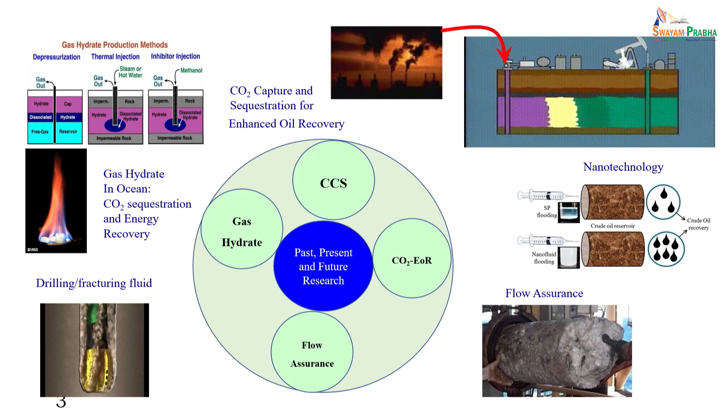So today's talk, I will focus primarily on properties of carbon dioxide, and then mainly on the capture side, CO2 capture and transportation. And of course, as I said, there will be talks given by various other faculties which will cover utilization, catalysis partly, maybe conversion, maybe electrochemistry, etc. So you have to connect the dots, right?

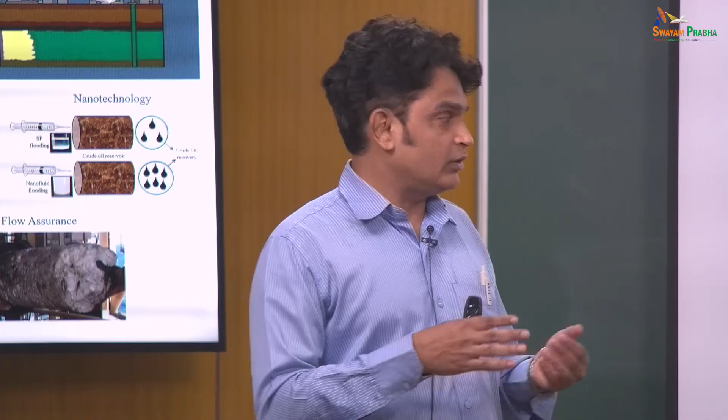So she has already discussed these climate issues and how the temperature is increasing. We are close to around 420 ppm or so, and we have been releasing about 36 gigatons of carbon dioxide into the atmosphere every year, and it is increasing day by day, right? Why is it important? Even if you talk about 420 ppm, the question is whether it is really a matter of worry. It's like out of 1 million balls, we have 420 balls. So do I really worry about it?

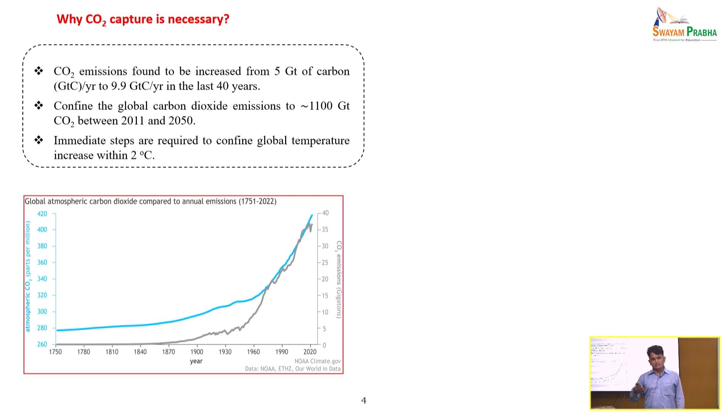It is indeed. There have been certain lab scale experiments where it has been shown that a small amount of CO2 can be responsible to increase the temperature. If you really make sure that all the conditions mimic the atmosphere, then the temperature will rise. For example, I sit in a car, close the door and then come back after a while, you can feel that the car is hot, you cannot really stay inside, right? So this is the greenhouse gas effect, and we have to really worry about it. And if you look at the data for the past several years, there is a rise in temperature. There are various other factors, but one factor is carbon dioxide emission, right?

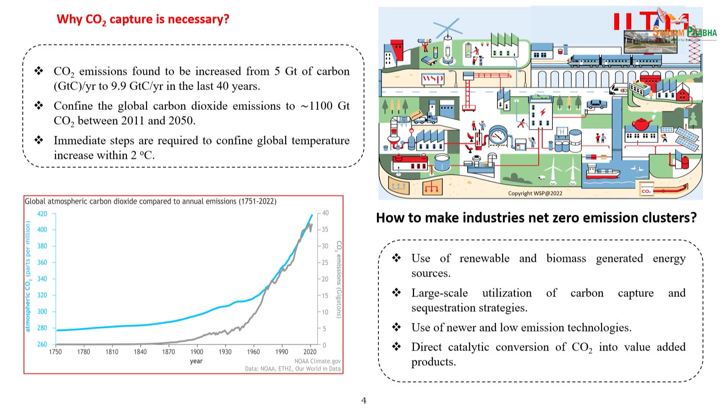Now how can we go for net zero? Of course renewables are something that we have to look at. But can we really go for renewables? That is a question. Can we really take care of all my energy requirement from wind, solar or so? No, it's not possible, because today about 82% of the energy mix is coming from fossil fuels all over the world, right? Growing economies like India and China are primarily dependent upon fossil fuels, including coal, oil, gas. If you go out of the campus, you will find several thousands of cars, automobiles running, including two-wheelers, and all use oil, petrol. If there is a strike by petrol pumps, there will be a mess in the city. All prices will go up, right?

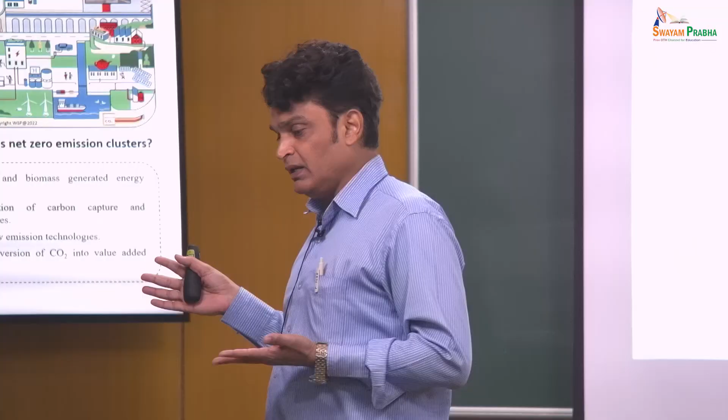So energy is very important for our living. If you do not get oil, there will be an energy crisis. And if there is an energy crisis, then there will be a food crisis. So all this is connected, right? Nowadays, it's not that we get only locally made food. We cannot survive on one thing, right? So energy is very important for our living, and our energy requirement is increasing day by day. I joined IIT Madras campus in 2010, and there were very few cars; even as an assistant professor when I joined, I did not have a car. I got it in 2021 or 22.

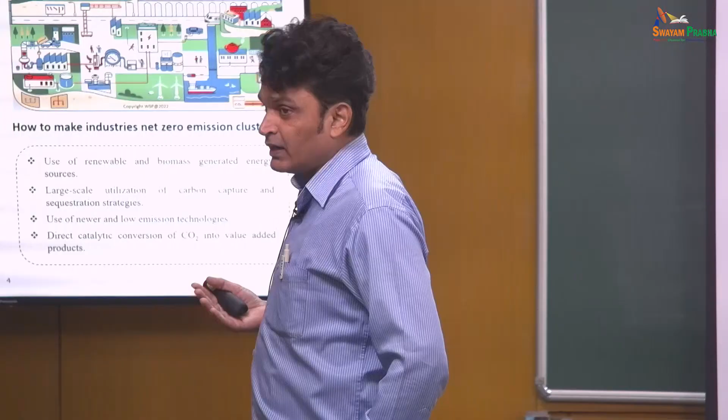I was happy riding my cycle. It's okay, I am living in a campus, why should I need it, right? My children were studying in Kendriya Vidyalaya, so they were going in two-wheelers, so I did not have a car, to be honest. It is not that I was not able to buy it. But today, any assistant professor who joins the campus comes with not only one car but two cars. Because his wife is also working, he is also working, so both of them have a car. So you can see the difference, right?

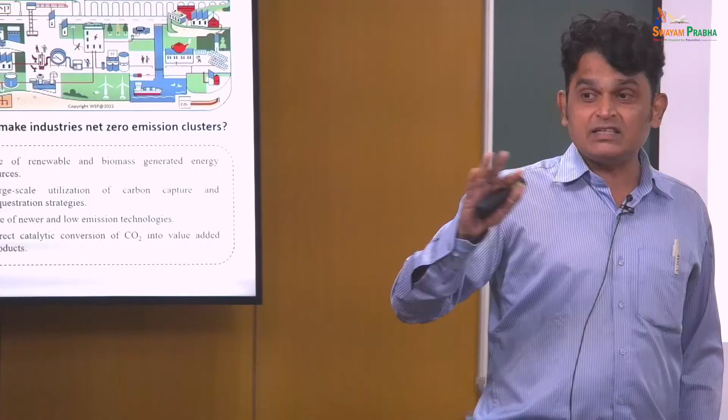All the classrooms are becoming air conditioned, right? Now that energy is not coming from nowhere, it's coming from electricity, and electricity is ultimately coming from fossil fuel, right? So we have to understand that our energy requirement is increasing. Just looking at everything, I have a dishwasher, I have all kinds of electric equipment, and that requires energy. So energy is very important, right?

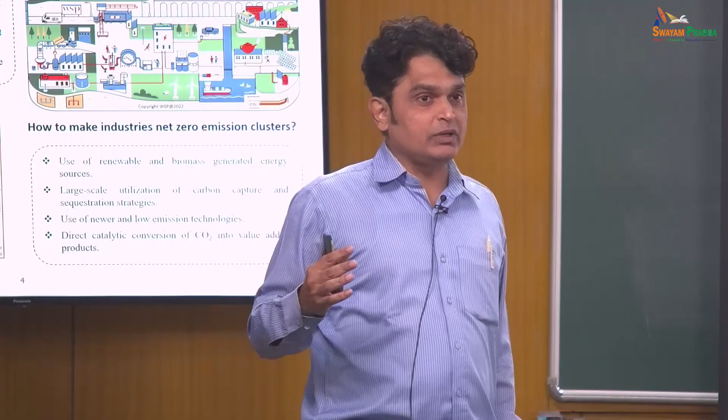So in a short time, or at least 3 to 4 decades, I do not see that we are going away from fossil fuels, right? There is not going to be a magic that suddenly after 2 years we will have something completely coming from renewable energies, right? And there have been certain studies which show that even for 50 to 60 years, fossil fuel will dominate the energy basket. The International Energy Agency says that. Anyway, I am not really going into detail about that.

So what is pollution? We talk about man-made pollution. We have solid land pollution. Everybody is aware of this, right? We have liquid water pollution that pollutes our rivers and everything, and you have air pollution. 3 major forms of pollution. Now what is the difference between them? If I go back and see, I can easily segregate this solid material from the land. I have plastics, I can segregate that easily, I can even hand pick that. It's easy for me to separate it out from the land, right?

Go with water, the liquid phase, molecules are different. It's slightly challenging for me to separate dyes from the water. So I need a membrane, RO, reverse osmosis, and all kinds of chemical processes that require additional energy, right? Go for air pollution, very difficult. Once it is in air, I cannot say that you see the CO2 molecule going from your nose, you capture that and put it in the dustbin. I cannot say that, right? So a molecule that goes into the air is difficult to capture, right?

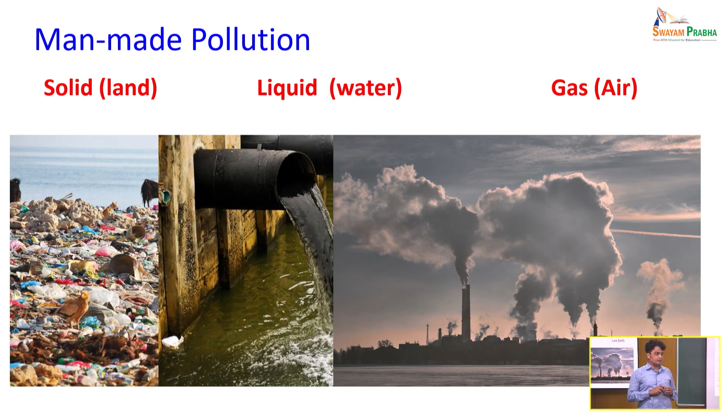So either you have to segregate before you make the pollution, or you segregate after you make the pollution. Which is easy for air? Before, right? So you segregate it before you release it into the atmosphere. That is the more challenging aspect of air pollution that we talk about. Of course, air pollution involves particulate matter and many other things that I am not going into in detail. But as far as CO2 is concerned, we have to ensure that technologies are developed so that before it goes into the atmosphere, we capture it and dump it somewhere.

All right. Now, of course, this CO2 emission is increasing, and as I said, the majority of it is from energy consumption, like transportation, energy used in buildings, other industries, etc. And of course, there are agriculture, forestry, and land use. So energy is a major sector that results in CO2, carbon dioxide, pollution.

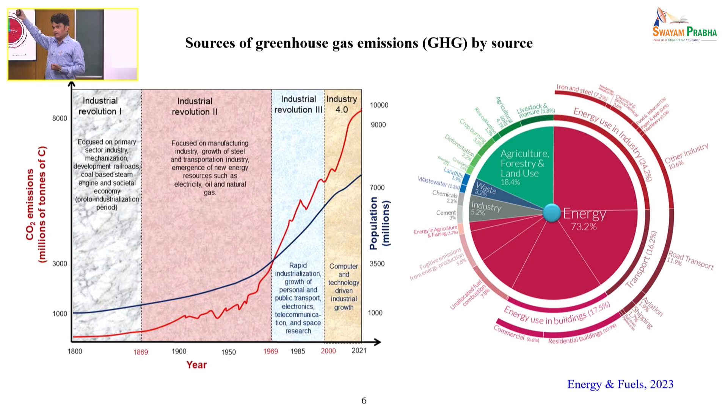Anything, you have a flyover that you can see in Adyar, right? They are building flyovers everywhere. Ultimately, that results in pollution, because you have to generate cement, steel, and everything. You have cranes running there, right? To generate cement, you require a lot of energy. You release CO2. Even to generate the steel required there. So every man-made activity ultimately has a CO2 footprint. Even the chair that you are sitting in is not CO2 free, right? It has generated a certain amount of CO2 into the atmosphere.

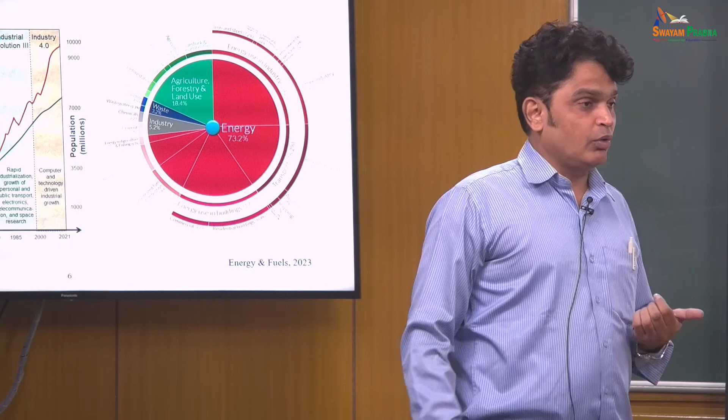So why I am telling you this is that today we are talking about a $3 trillion economy. The Prime Minister says that we have to go to $5 trillion, $10 trillion, and so on. Every country wants that, right? Can that come saying that I am not going to emit CO2 and still I have a $10 trillion economy? It's not possible. There has been a correlation of CO2 emission with economics rather than really population. The higher you want your economy to be, the more you become a consumer. You consume and throw, right? So sustainability is an important aspect of this whole game. Anyway, going forward, now the global temperature is rising.

I think Madam had already covered that, the global land to ocean temperature anomaly, and somewhere around the 1970s, 80s and beyond, it is increasing. Now there are various scenarios that show, if you capture carbon dioxide or if you do not capture carbon dioxide, how the annual mean global temperature will rise in the next few years, right?

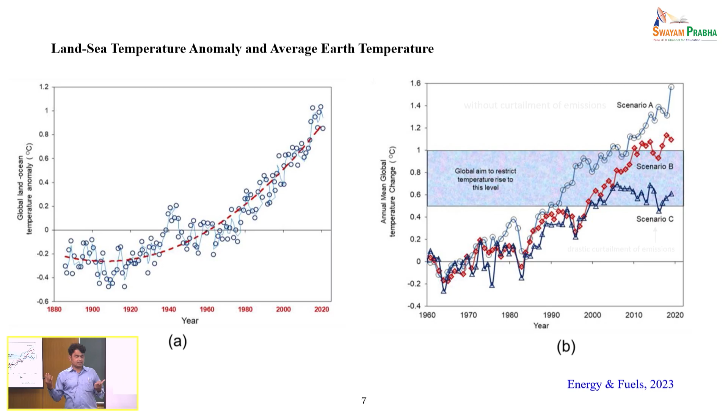And there are certain models. I think Madam will cover that in detail, so I am not really going to spend more time on that. But you have to understand that we have to predict the future 20, 30, 40 years down the line in energy, environment and earth. So if you look at the name of my lab at IIT Madras, I have written 3E lab. It talks about earth, energy and environment.

It is a nexus. I cannot say that I do not want energy, but I want less CO2. The more energy you want, the more CO2 you are going to release into the atmosphere. So you have to dump that into the earth, or you have to take care of your environment, right? So all these 3 E's are important when you look at overall climate change, and this nexus has to be understood.

Anyway, so this is an example of coal, right? In the 1970s, 50s, 40s, you might have seen steam-based transportation through trains, etc. The British used to have trains, right? And then because of pollution, they stopped that. I am not going to run the train on coal because it generates a lot of pollution; I should run it on electricity. Now, most of the trains are actually running on electricity.

And this is the data that shows that from somewhere around 1950 onwards, the use of coal in transportation has decreased. It's almost negligible from the 1960s onwards, right? I do not see coal. Earlier, when I was a child, I could go into the market and buy coal, right? Coal was even used in households for cooking. Kerosene was used in households, right?

But today if I go into the market, I will not get coal easily. I have to find out; somebody will say go here and there, right? Getting coal is not easy right now in the general market. But look at coal use in electricity generation. It has increased. So when we cannot see something, does it mean that we are going away from coal?

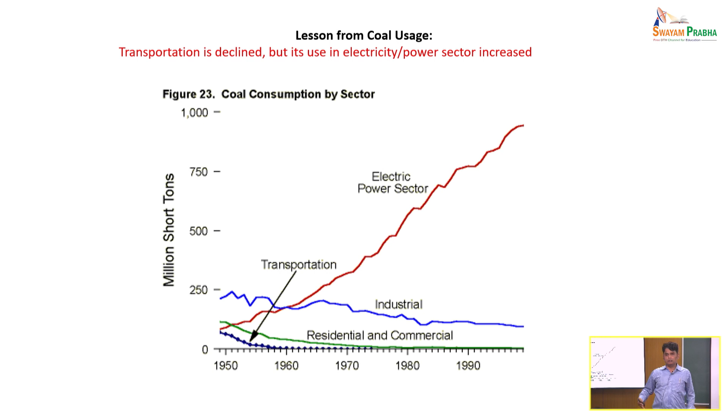No. Even today, as Madam said, Germany wants to restart their coal-fired power plants. I was reading a couple of weeks back that New Zealand also wants to import fossil fuels, right? So they have realized that it's not a quick decision to say that I am not going to use fossil fuels, right?

So take electric vehicles, for example. I am a little critical about electric vehicles. Of course they look very clean, but if you go back and look at the calculations, you will find that they are more difficult for the environment, because they do not reduce the electricity requirement. Where will the electricity come from? If we really generate all electricity from solar energy, then that's fine, right? But I am not seeing that happen anytime soon.

Even to make silicon solar cells, there are calculations in the literature which show that they also generate CO2. So nothing is CO2 free or net neutral. Less than 1% of vehicles on the road are electric vehicles. There are about 15 million or so electric vehicles. But given that I am happy with electric vehicles, does it mean that I am going to go away from fossil fuels? I require more energy.

Anyway, going forward, CO2 in the atmosphere. Nature has its own way to address the CO2 concern. It has said, okay, whatever CO2 is being emitted, I will capture that. Almost 50% of CO2, it has been said, nature takes care of on its own; it absorbs it. But because we are growing our economy and burning more fossil fuels, the net CO2 going into the atmosphere is increasing gradually every year, and it is getting accumulated.

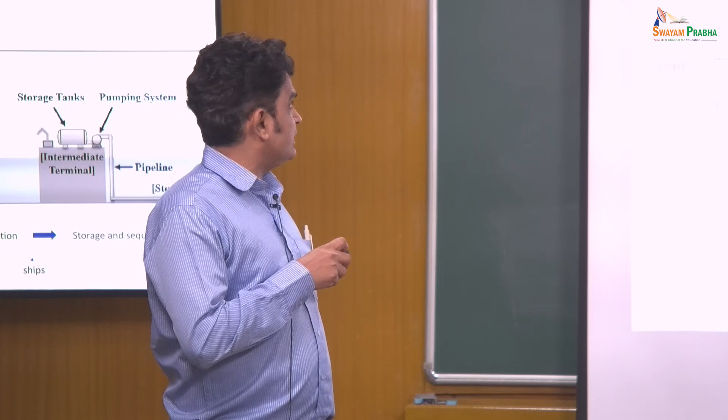Now in one of my talks next week, I will discuss how oceans are a very ideal candidate to sequester carbon dioxide. Scientifically, it is very attractive. Anyway, when you talk about onshore or offshore, you require all these facilities: processing, liquefaction, pipeline, and then ships, and then you have to sequester below the ground, onshore or offshore in the ocean. Now this is a CCS supply chain: carbon dioxide capture, transportation and sequestration, and utilization, where you have to convert that into value added products like methanol, ethanol, dimethyl ether or something like that.

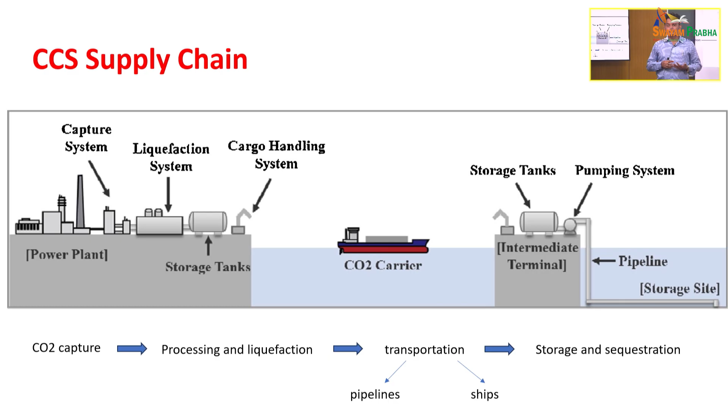What kind of product can you convert CO2 into? Anybody else? Urea. What else? Carbonates, methanol, right? Most of these conversion processes still require energy, right? The raw material that you require, for example for methanol, requires some kind of hydrogen molecule. Where will the hydrogen come from? Today 99% of our hydrogen comes from fossil fuel, right? Less than 1% comes the so-called green way. This is what the International Energy Agency report says for 2021, right? So conversion is still a long way to go.

Utilization, unless I could get hydrogen from biomass or from water by splitting water through solar energy, which is again very tricky. Of course there are technologies available, but these are not something that can be looked at on a large scale. I cannot say that I have all hydrogen coming from solar power plants by splitting water. I can do those experiments in the lab, but it's still a long way to go. So what is a quick way to act? I am not criticizing any technology here. I am saying that I do not have time, I want a certain quick decision. So the quick decision is that I have to dump it somewhere.

Huh? Dump it in sea or onshore? No, I will tell you that it's not that. It's at least more favorable in ocean or onshore. Scientifically, that is proven, right? So anyway, we will discuss that.

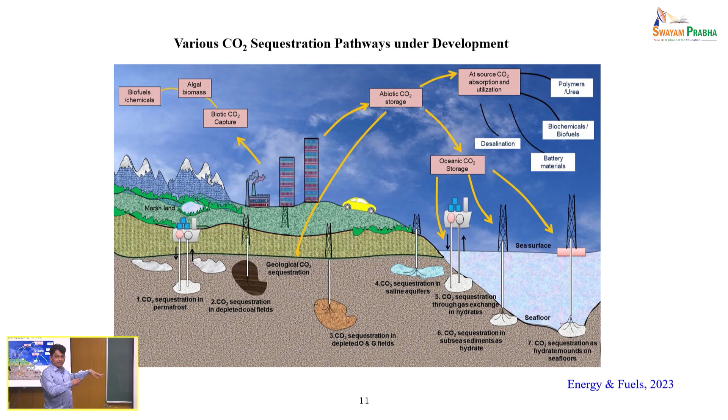The other potential region is the sea floor, where you can sequester it in the form of solid hydrates or below the seabed, and that I will discuss in one of the next classes; it is not the focus of today's discussion. Madam will partly cover aquifers and EOR, etc. Though we have worked on that, I think Madam will be best to discuss all these details. Anyway, so this is the ocean storage.

So in the ocean you can sequester in different aspects. You can do CO2 plume sinking. You can have disposal of CO2 in the form of carbonates, because CO2 can convert into carbonates. You can actually have CO2 liquid pools in offshore conditions; CO2 will form a liquid in those conditions. I will discuss that in detail in the next class, how CO2 can form a liquid in the ocean and why it is safe.

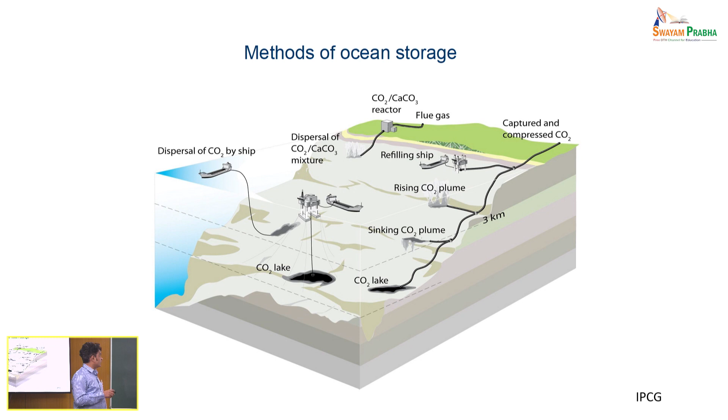And anyway, this is generally the CO2 storage mechanism. You have flue gas, a CO2 separation reactor, captured carbon dioxide is compressed, and then you can transport it through pipelines, ships, risers, etc. Now there are various technologies available right now, from CO2 capture to sequestration. And this is TRL, technology readiness level, which goes from concept to commercialization.

Most of the technologies, you can see, are at TRL 9: post-combustion capture of CO2 from power plants, pre-combustion capture of carbon dioxide specifically from natural gas processing, transportation in onshore and offshore pipelines. CO2 is being transported; even though in India we are not doing it, in countries like Norway and the US there are onshore and offshore pipelines transporting carbon dioxide. Then transportation by ships, CO2 sequestration in saline formations, and CO2 injection in depleted oil and gas fields or for enhanced oil recovery. These are all at TRL 9.

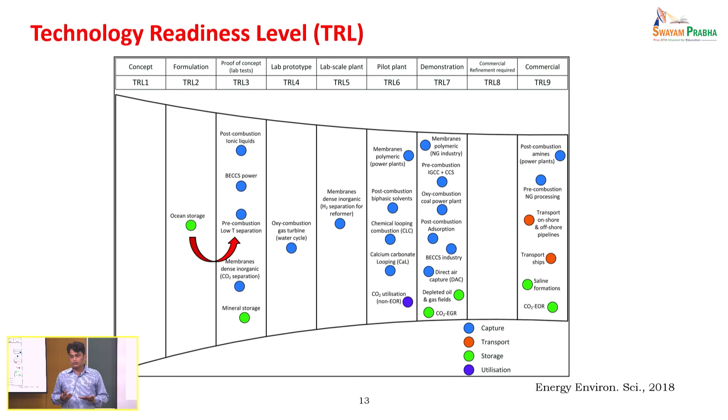Anyway, why this major focus on CO2 capture? Because to segregate it from air or flue gas, you have to capture carbon dioxide first. One way is to capture CO2 from flue gas; another way is to capture CO2 from air. As I said, at 420 ppm it is a very small amount, very difficult. I do not know where the CO2 is lying here in the room. Challenging task. That is called direct air capture, DAC.

People are also looking at direct air capture technologies. There are plants available commercially, but they are still not seeing major expansion. But slowly it is expanding because the government has to do that.

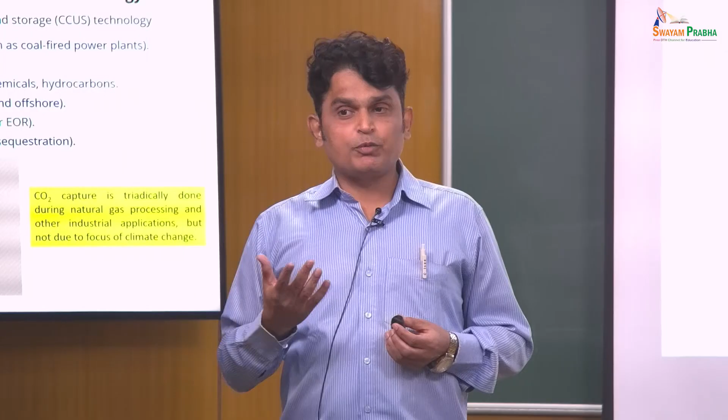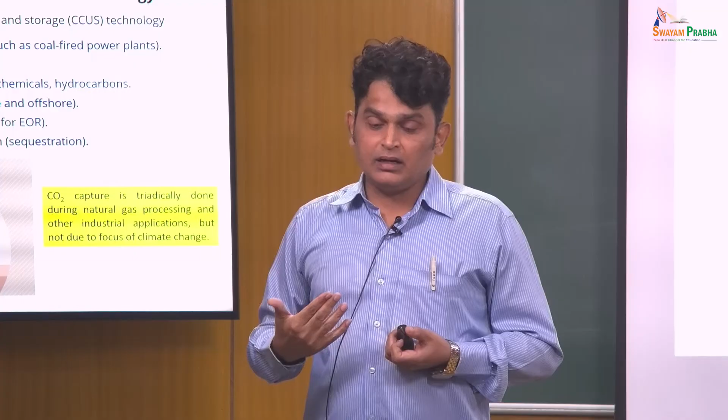Now this is junk that we produce. When I segregate my waste, I am not generating anything out of it, right? I still have to pay the corporation; they charge me a tax or something like that. So we pay for segregation. Similarly, as human beings, to ensure we are in a safe environment, we have to pay for that, so there will be a penalty in terms of money. Technologies are looking at how to reduce the cost of capture, transportation and sequestration, and in the last few years that cost has come down slightly with developments in technology.

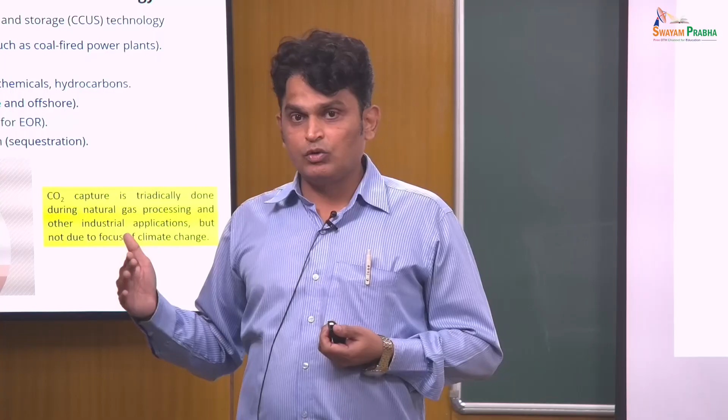So we'll discuss a little bit of the cost aspects, right? Now the CO2 capture: either looking at a stationary plant or point source like a coal-fired power plant, or you can do that from direct air capture. You can convert that CO2 as a feedstock for petrochemicals and hydrocarbons. Again, challenging, as I said, it takes time.

You have to transport that from the point source to the storage sites, either onshore or offshore, by pipelines, and you have to inject that into the underground for enhanced oil recovery or depleted oil and gas fields, etc., or you can do that in the ocean, right?

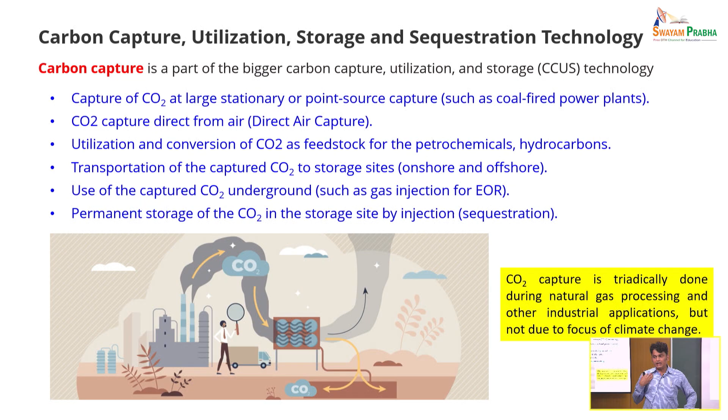CO2 capture is traditionally done in natural gas processing and other industrial applications. It's been there earlier; it's not something that started recently. The natural gas industry has been doing it for a long time, right? But they were not focused on climate issues. So the technologies were available for specific applications.

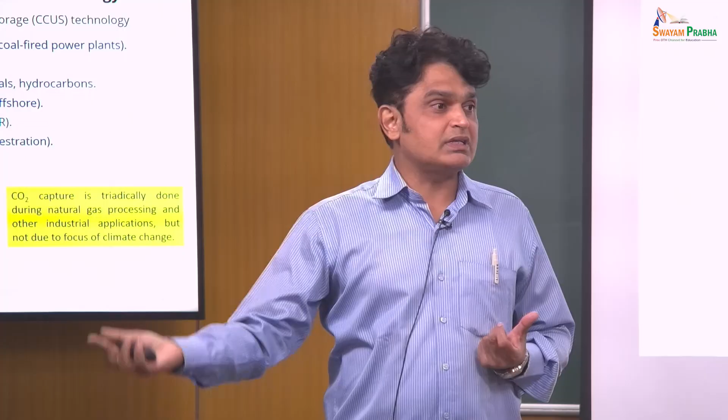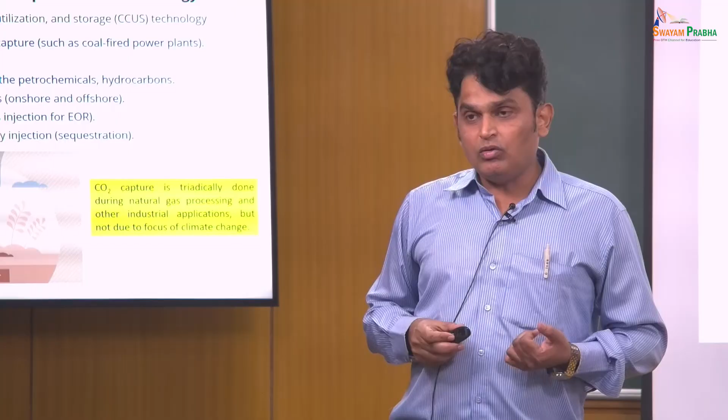Now similar technologies are being expanded, and of course new technologies are also coming up to take care of the CO2 from flue gases, power plants and other industrial activities where CO2 can be captured and stored. Now this requires significant strategic decisions.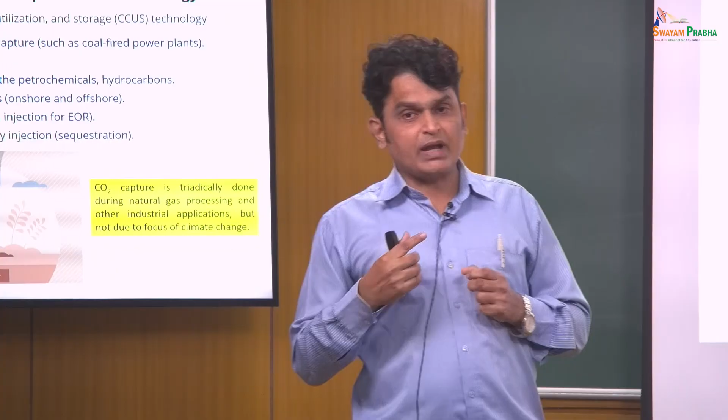Why? Because one has to understand that you need to develop CCS corridors where I can capture CO2, transfer that to the pipeline, sequester it into the formations, or use it in industrial applications. So CCS corridors have to be developed by different countries so that this overall process can be made very efficient, right? So anyway, what is important about carbon dioxide?

Now if you look at this carbon dioxide phase diagram, everybody understands the phase diagram, right? Simple stuff. Carbon dioxide remains gas in this zone, this is liquid and this is supercritical fluid. The temperature is about 300 Kelvin, which is the critical temperature, and about 100 bar, which is about 1500 psi or 100 atmospheres, or 10 megapascal, is the critical pressure for carbon dioxide. Any pressure and temperature above that, it becomes supercritical.

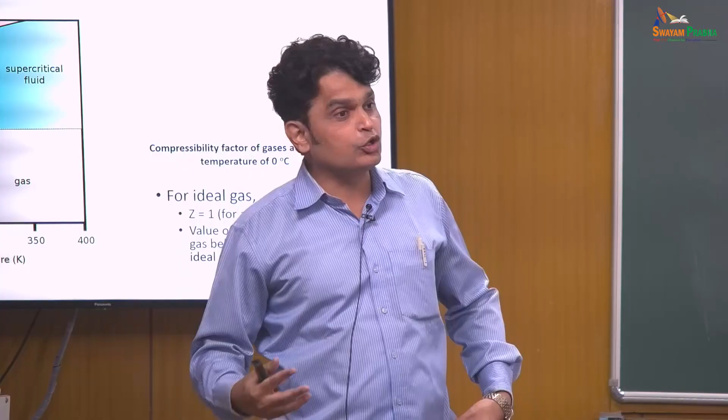Why is it important? Because we should talk about onshore underground storage. Most of the temperatures in the reservoir fall in this zone. So CO2, once it goes into the reservoir underground onshore, becomes supercritical. Supercritical CO2 has different properties, not the same properties as a gas. So you have to understand how supercritical CO2 will interact with different reservoirs like sandstone, shale, or basalt formations.

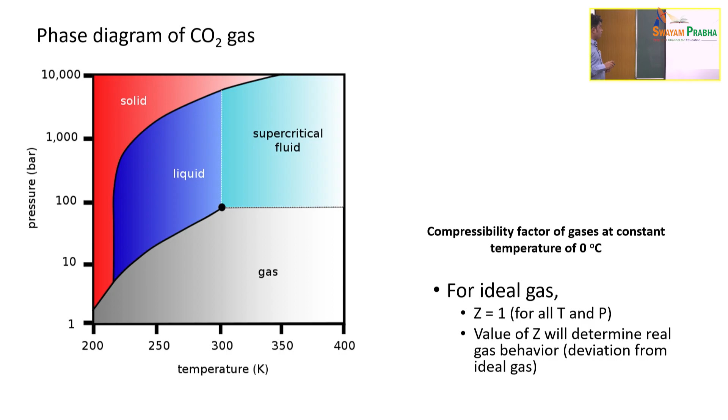If I want to inject CO2 into the ocean, the CO2 at a certain depth will become a liquid. Ocean temperature is close to 4 degrees centigrade, about 270 to 280 Kelvin, and at pressure beyond 5 megapascal it becomes a liquid, right? So if I want to dump CO2 into the ocean, it becomes liquid at those conditions. We will discuss that in detail later on. But this is a very important figure which tells you the different phases, gas, liquid and supercritical fluid, as far as CO2 is concerned.

Now everybody knows that any gas is ideal at normal temperature and pressure, Z equals 1, right? As far as CO2 in the atmosphere is concerned, I do not have to worry about it. But when I transfer it through a pipeline, onshore or offshore, the pressure and temperature will not be atmospheric, and therefore CO2 will not be an ideal gas; it will become a real gas. This simple schematic shows Z versus pressure in atmospheres, from 0 to 1000.

You can see nitrogen, this is for hydrogen, and the extreme lower line is for CO2 and the second one is for methane. You can look at Z for these 4 gases; they vary differently. All have a Z of 1 at normal pressure and temperature, but as pressure increases, the value of Z differs for individual gases.

For hydrogen, Z always becomes more than 1 as pressure increases beyond atmospheric conditions, and therefore hydrogen storage is still a challenging task because of this property. So the volume required to store hydrogen increases as you increase the pressure, and it has not become economical as far as hydrogen storage is concerned. Hydrogen has a molecular weight of 2, a very small molecule.

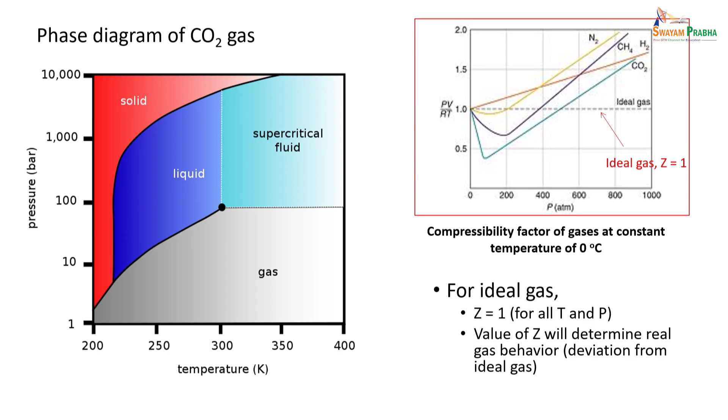For example, I will tell in one of the slides that CO2 is transported at about minus 30 degrees centigrade in liquid form. So what is the pressure required in that condition? It can be low pressure, so I can have a container. LNG, liquefied natural gas, they transport at about minus 170 degrees centigrade at atmospheric condition, because methane becomes liquid at that condition. Similarly, CO2 becomes liquid at minus 30 degrees centigrade, so they transport that. CO2 transportation by ships is more reasonable at those conditions. So some of these properties of CO2 are very vital to understand.

Now one chimney per hour emits how much? This is actual data from one power plant. Can you tell me how much ton is that? Close to 3000 ton per hour, right? Everybody is with me? Assuming this is about 20% carbon dioxide, easy for calculation, how much is that? 600 ton per hour multiplied by 24.

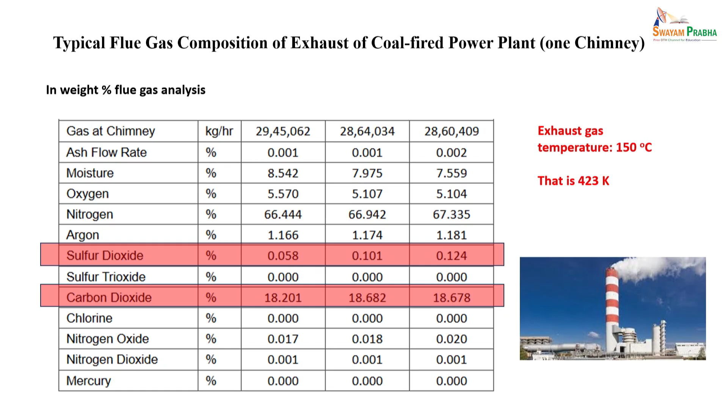I asked them, why don't you cool it down? They said, if I cool it down, the sulfur dioxide will deposit in my chimney and it will corrode. So they do not want to do that. So they are releasing the heat into the atmosphere at the cost of avoiding sulfur accumulating in their chimneys. Of course, CO2 is going out there. Alright. So this is the situation.

Now, the carbon dioxide property that I have discussed: carbon dioxide is not available as a single molecule in the atmosphere or even in the flue gas. It is available along with different other gaseous components. Therefore the properties will change, properties like density, viscosity and so on. So you require equation of state models. You must have studied equation of state models like Peng-Robinson, SRK, Soave-Redlich-Kwong and so on. You use those equation of state models to understand the properties of flue gas and design your operations to separate carbon dioxide from the flue gas. Everybody is with me, right?

Now, what are the important aspects of flue gas generation in the power plant? As I said, energy is important, so we cannot move away right now from the coal-fired power plant. So typically we have a power plant that has to be connected with CO2 capture systems, as shown here schematically. You can have a CO2 scrubber and an SO2 scrubber, as I said, that you have to separate out. You require different types of material because it is not easy to handle SO2, sulfur dioxide.

You have a flue gas that goes into the absorber where you can have different systems like amine systems. You can separate CO2 and capture that. You can have a stripper unit, separate the pure CO2, and then the CO2 can go into sequestration or transportation. You are getting my point? So this is a typical schematic of how the combustion and associated CO2 capture process looks. Let me come, right?

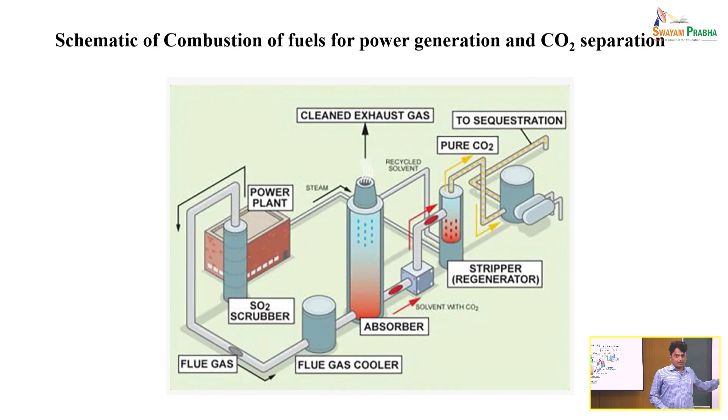Now there are 3 major types of combustion capture. You can do a pre-combustion capture of CO2 or a post-combustion capture of CO2. You can capture carbon dioxide before you release it into the atmosphere. In a pre-combustion process, a fuel is converted into a gaseous mixture of hydrogen and carbon dioxide. You partially oxidize coal in oxygen and air and generate a synthetic gas, syngas. The syngas can further be converted into a mixture rich in hydrogen and carbon dioxide.

The advantage is that you are capturing carbon dioxide at a reasonably higher concentration, so it becomes easier to capture. As I said, when you have less CO2, it becomes very challenging to capture. When you have more CO2, you have a better chance of capturing it. The hydrogen can go into electricity generation, and you can capture that CO2 and store it. Here the CO2 in the mixture can range from 15 to 50%. This requires an integrated gasification combined cycle power plant.

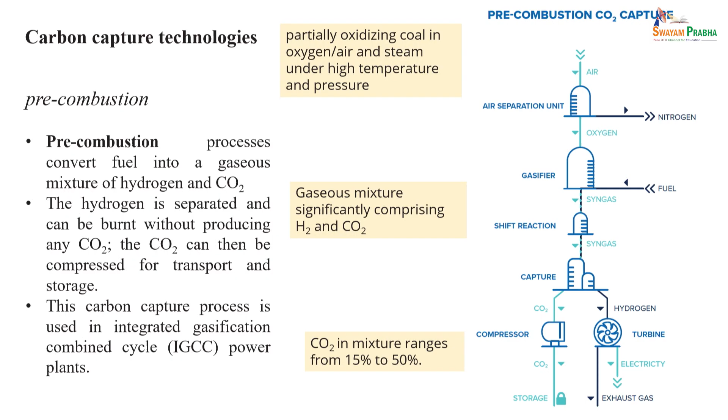These are less available. People are reluctant to do that because it doesn't really add any value to them technically or economically. So unless they get some money, they don't do that. So this is primarily a money game: what really makes it economical, that's the question. Now the other method is post-combustion capture. These are the limitations. Pre-combustion has high efficiency and relatively easier carbon removal from fossil fuel. The advantage is that the hydrogen-rich stream can be converted into electricity efficiently.

However, the overall capital cost of the gasification-based process exceeds that of the conventional pulverized coal-fired power plant, and that's discouraging wider adoption. The cost of the absorption process required to capture CO2 generated by an IGCC power plant can range up to $60 per ton, which is still not very attractive to the companies.

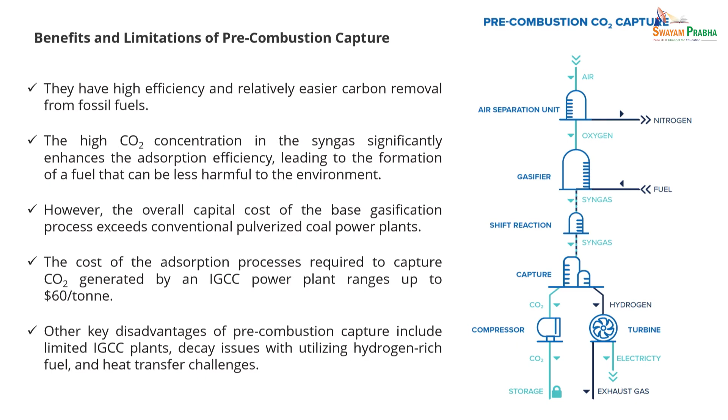Other disadvantages of pre-combustion capture include limited IGCC plants, issues with utilizing hydrogen-rich fuel, and heat transfer challenges. Again, as I said, hydrogen handling is a very challenging task, with safety issues and so on. So this is still at a stage where more research has to be done.

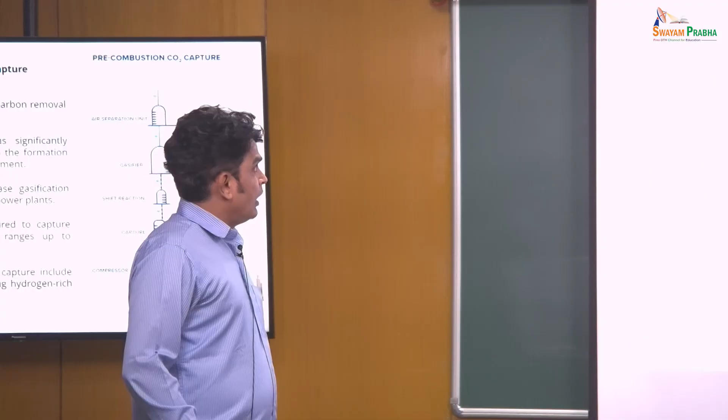Then we have post-combustion capture, which right now is something that people are looking at attractively, because you combust it and then capture CO2, and technologies are available ready made, because you can use conventional technologies to capture carbon dioxide. The challenge is that here the CO2 is very low in the stream. It can be less than 20%, 7 to 14% sometimes, and 4% in a gas power plant. So this is very challenging to compress, but it is reasonably easy as compared to pre-combustion capture.

So this is what a post-combustion capture schematic looks like. You burn fuel, you have exhaust gas that goes into it, you have electricity, and then you capture carbon dioxide and store it or transport it for subsequent processing.

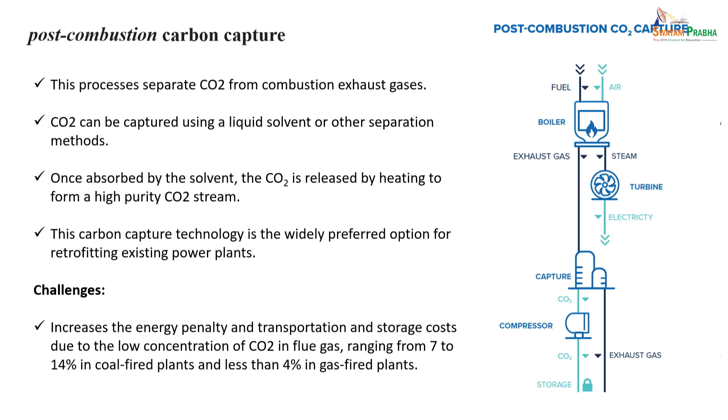Something that is very attractive is oxy-fuel combustion capture. Oxy-fuel combustion capture is a more promising technology that people are looking at. Oxy-fuel combustion uses a pure oxygen stream. So I am not really going to use air as a source to burn a fuel. I will use a reasonably pure oxygen stream to burn the fuel, so that I generate more CO2 which is rich in concentration.

It becomes easy for me to separate or capture that CO2, or I may not necessarily need to capture that CO2, because even if I have 50% or more CO2, I can send that directly into underground storage. I can transfer that directly to the storage. So I can partly address the cost of the capture part, by using a pure oxygen stream to burn the fuel.

So this is a schematic that shows you have an air separation unit where you generate oxygen. During COVID time, oxygenators were used, right? You know that. You get oxygen from air by separating it in a small unit. So a similar kind of thing here.

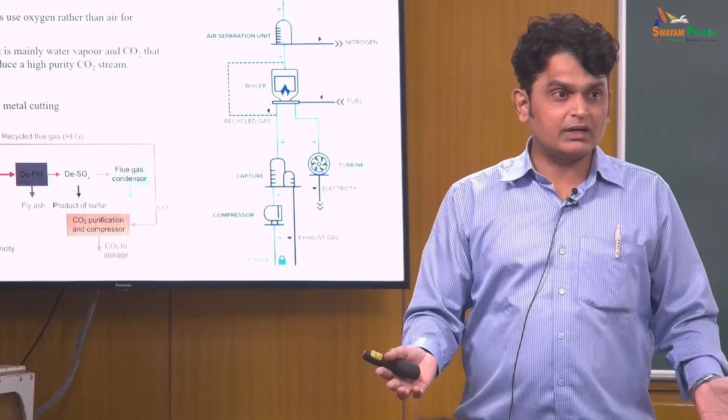You can separate oxygen from the air and use the purer oxygen in the boiler, and because you have oxygen, mainly complete combustion is expected, so you have more CO2 going into the exhaust gas, which becomes easy to capture, and then you transport it to the storage site, and of course you get electricity out of it. So this is a schematic of what I have talked about. You can also have sulfur that may come out, so you can capture the sulfur. So reasonably it is easy to capture CO2 from this stream.

This has been used primarily in steel making and the metal cutting industry, but it also has an advantage that it has a high flame temperature, because you are using better quality oxygen. So the efficiency of the power plant may also increase. There may also be challenges with heat losses, because you have a higher flame temperature, so heat losses have to be curtailed. That's what we have in oxy-fuel carbon capture.

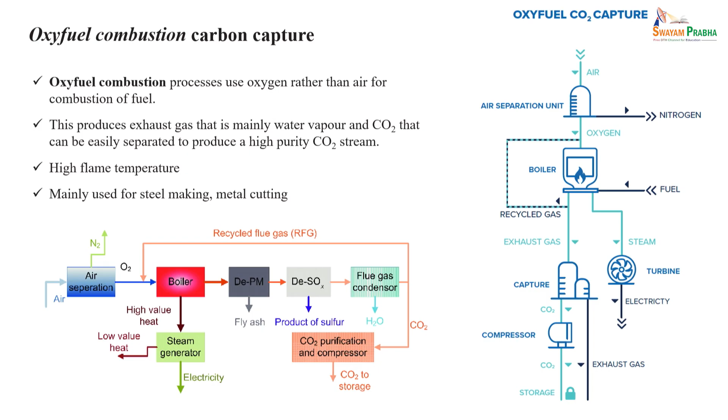So this is something different from that. It's still challenging, I am saying that. So we have to look at the cost benefit; all the decisions will depend upon the cost factor. What I am trying to tell is that this is a promising way. As a technologist or as a scientist, I feel that this is a very attractive proposition. Of course, how cost can come down, whether we can have a better technology to separate oxygen from the air, that we have to look at. So this is a cost game ultimately. Anything where we have to put up a plant, cost will play a role. Yeah, of course.

So this is the overall scenario. We have post-combustion, we have pre-combustion, we have oxy-fuel, and there are certain industrial processes where you generate oxygen, you have a CO2 separation unit, and then you compress and dehydrate it. Now this is the capture part of it. So a whole lot of technologies go in. As chemical engineers, we have absorption, adsorption, etc. All these concepts go into separating out CO2 from flue gases. More focused on this.

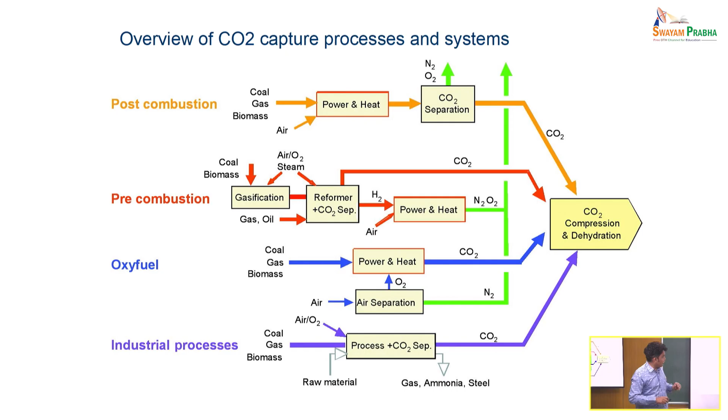So this is CO2 capture traditionally done in the oil and gas industry. As I said, natural gas reservoirs often produce carbon dioxide. So to separate that, amines were often used in the oil and gas industry, and in other industries they are very widely accepted solvents. So this is a CO2 separation and C2+ recovery plant in the Middle East. They separate out sour gas, I mean the CO2 and H2S.

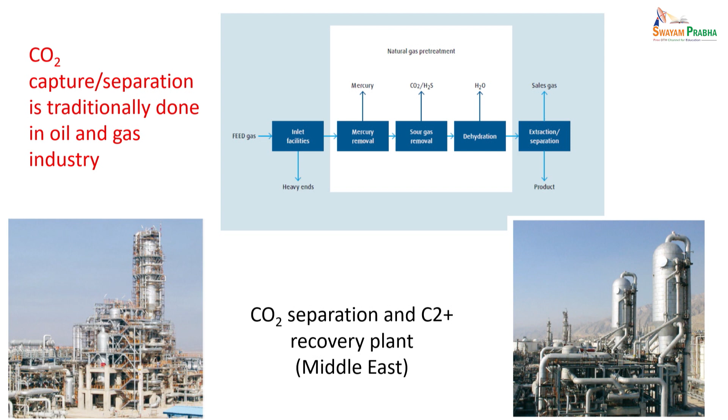You can also have a dehydration unit where you separate out water, and then you have a product gas, and you can actually have CO2 and H2S that might go into the atmosphere. They may not really worry about it, because that is not enough CO2 that can be transported, so they may release it into the atmosphere, or they may sequester it into the subsurface reservoir. So these are things that are being practiced in the industry.

So the major solvent-based system, and in the next couple of weeks you will hear about different technologies, people may talk about adsorption, etc. I will just briefly tell you that amines are still widely utilized as a solvent system, because they have a better efficiency to capture carbon dioxide. It can go beyond 80% in certain cases.

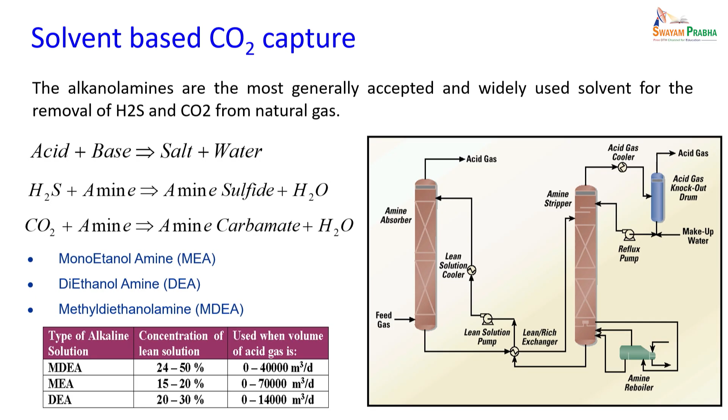You can have amine sulfides, and then you have a typical schematic where you have an amine absorber and a stripper. Absorption takes place at relatively 40 degrees centigrade. You strip it at about 100 or more than 100 degrees centigrade, so you separate the carbon dioxide from this stripper and take it away. So design aspects can be looked at: what size of absorption and desorption columns are required based on the amount of flue gas that you handle.

Simple chemical engineering principles go in: equilibrium constants and equilibrium ratios, the number of plates that may be required, or the packing height that may be required. So all those simple calculations are possible here. Now there are power plants available, there are CO2 capture plants available. It's not that this started recently, but very few efforts were made.

In 2009, this is in Alabama, the power company plant in Barry, which was one of the largest at that time, based on a coal-fired power plant. Here CO2 was captured using amine solvent technology and transported to a geological storage site. About 114 kilotons of CO2 was captured, transported, stored, and monitored through the pilot project. So this was done in 2009. There were efforts made 15 years before. Now it has been accelerated.

There is Norway's Sleipner project, very famous, and Japan's Tomakomai project. You can see that Norway has been looking at CO2 storage in offshore subsea sediments or saline formations for more than 25 years. The Sleipner project separates CO2 from natural gas produced at an offshore platform, and the CO2 is then injected and stored in the adjacent offshore formation beneath the sea floor.

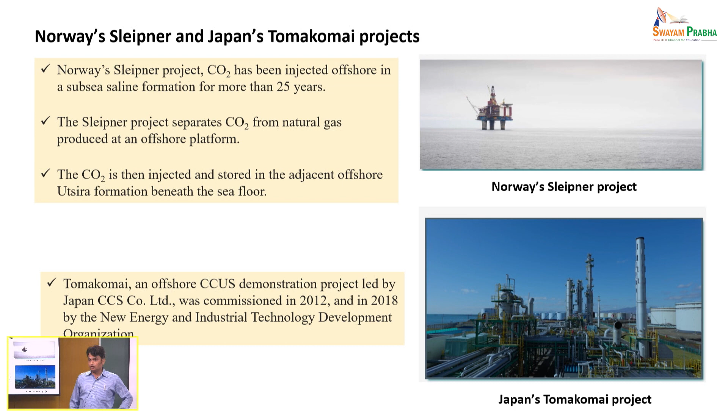And the Japan project is a demonstration project by Japan Carbon Capture Sequestration Company, which was commissioned and recommissioned in 2012, 2018 and 2020, and they have shown that CO2 can be captured and transported for subsurface geological operations. So there have been efforts made. I will also show you in one of the next classes that there are additional efforts made at the pilot scale. Now we are not behind, but we are taking a small step, being an academic institute.

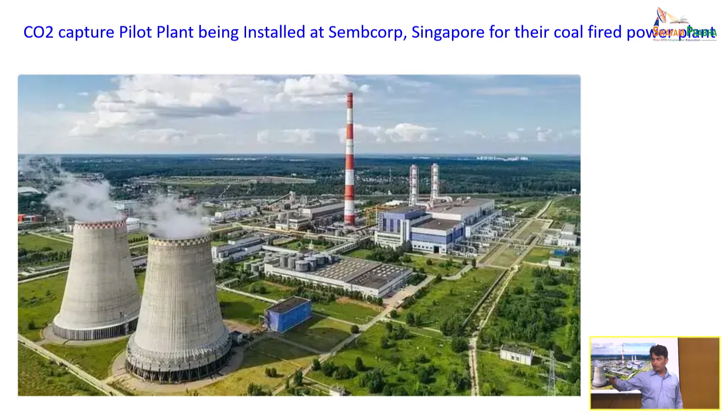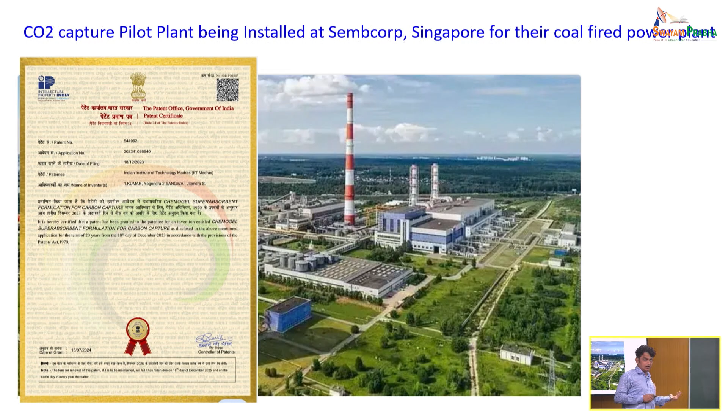As I said, Sembcorp came to us and said, okay, we have this chimney and we want to capture the carbon dioxide. So this is an effort we have done for a power plant. Yogendra, sitting next to me, is my PhD scholar. He worked on amine solvent and improved its efficiency by a certain magnitude. Then we filed a patent and got it approved very recently, in 6 months. This is an Indian patent, and now a pilot plant is ready for installation.

This pilot plant has been delivered to the field at the power plant in Sembcorp, about a 4-hour journey from here. It has been developed based on this patent, and we are doing some studies there to see if the CO2 can be captured efficiently with the system. Why have we selected amines? Because it is a very proven technology. So I can improve that technology further by one step and then use it for my application. So this is being done.

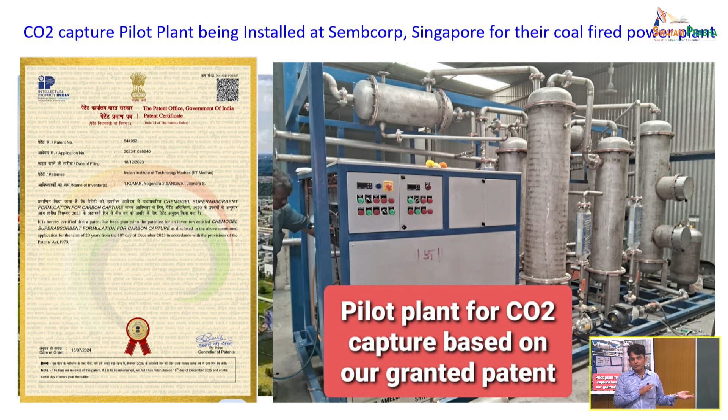We'll have results hopefully in 1 month or 2 months time to see, and once we are done with this, we have to just multiply that. I do not have to really reinvent the wheel. I already invented the wheel. I have to just re-multiply it. So we are just waiting for the results outcome, possibly we will see that.

Now transportation and transport process is a very important factor here. It's not something that I capture and forget about, right? I have to store it. I have to store it in a storage tank, then I have to liquefy it. I have to transport that by tankers. I can transport that by ships and pipelines to the storage site or even in the industrial application, right?

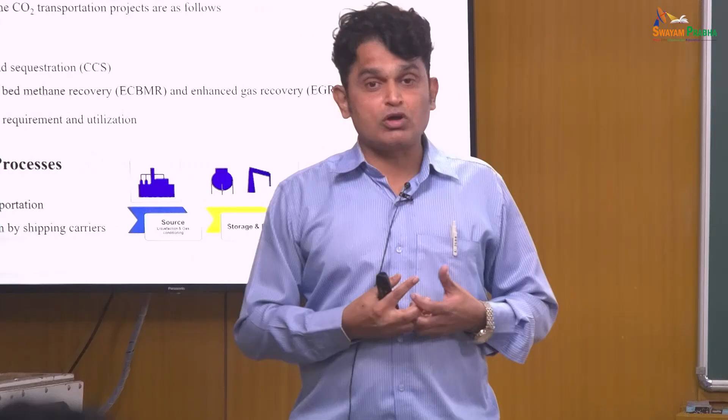So CO2 is not a very easy molecule to handle. Even though it is not flammable, it is highly corrosive to the environment. Any system of metal that you expose to carbon dioxide, which is rich in concentration, will corrode over a period of time. Less concentration, I do not have to worry, but if I want to handle pure carbon dioxide, it's not an easy task.

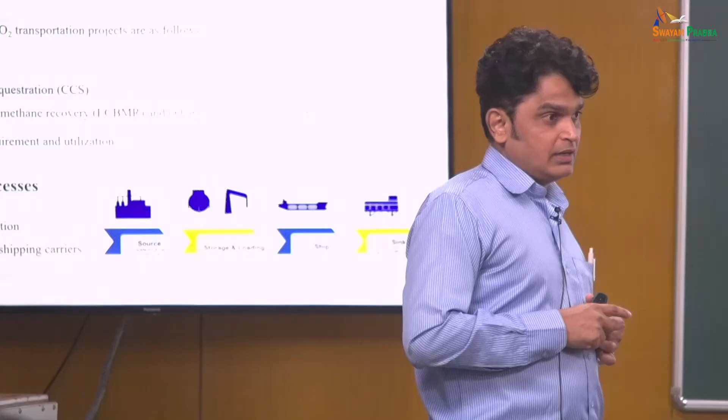It's a highly corrosive system. Even the oil and gas industry is putting a lot of money to develop materials which can address handling of carbon dioxide at certain temperatures. CO2 becomes more corrosive at higher temperature and pressure conditions. So this is again a very challenging task, right?

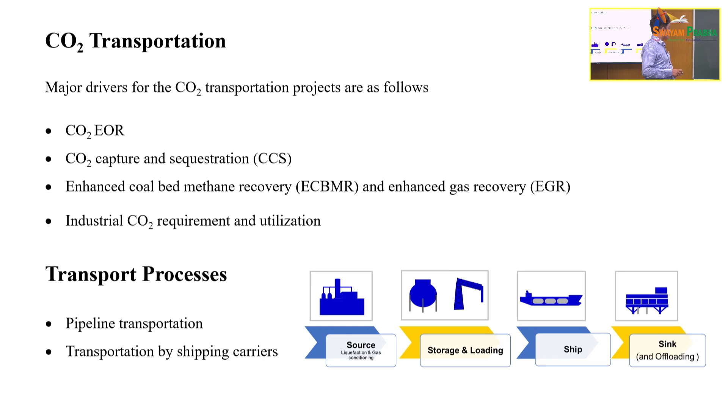So if you look at this transport process, it is required because you have to transfer that to the sequestration site, for enhanced oil recovery, for coal bed methane recovery, for offshore or onshore or industrial requirement, right? So this is a total schematic, which shows that you have to store and load, and then you have to ship and then sink, right? Pipeline transportation or transportation by shipping carriers, so these are something that we have to worry about, right?

So there are various methods. I can do that into the ocean, deep sea CO2 storage site. You can do this via injection platforms like this. So I can use existing oil and gas platforms offshore or onshore to do the sequestration. So I do not really have to worry about too much additional capital investment.

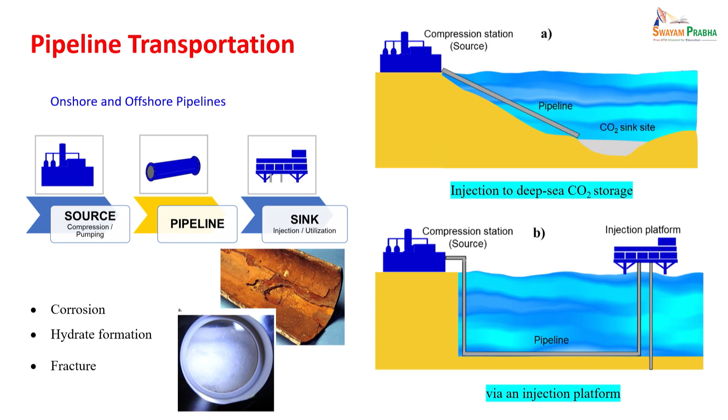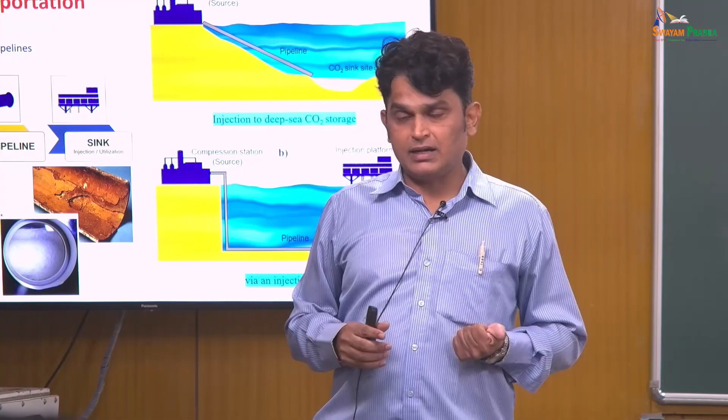Of course, in certain cases I may require that, but I can use that. However, you have to worry about certain aspects of corrosion, hydrate formation and fracture that may result in metals. If I want to transfer that at low temperature, high pressure, then metal may not be able to sustain those conditions, right? So you can see this kind of corrosion. So types of corrosion that can happen due to CO2 and other acid gases.

So everybody knows that CO2, when it comes with water, can form acids. Yeah, pure CO2, but getting a pure CO2 is very challenging. As I said, 100% pure CO2. Pure CO2, that's what I am telling you. So even small moisture that goes in, dehydration, storing it. As far as pure CO2 is concerned, you do not have to worry about it. But if it is not completely pure, then it may cause certain amount of corrosion in the systems.

So, but are you able to generate a pure CO2? What is the percentage? Agreed. But in case you do not have that much pure CO2, yeah, of course. Agreed. So my objective here is to tell why pure CO2 is very necessary. If you do not have pure CO2, if you have water vapor,

yeah, agreed. But that's what I'm telling you. When you have pure CO2 available, here pure means maybe without water vapor, without any additional gas stream that may be hazardous to the metal, then you do not have to worry about it. But if you have moisture along with it, if you do not take care of it, if certain kinds of contamination happen during transportation, in a pipeline for example, there is a leak, etc., it's possible that something may leak in.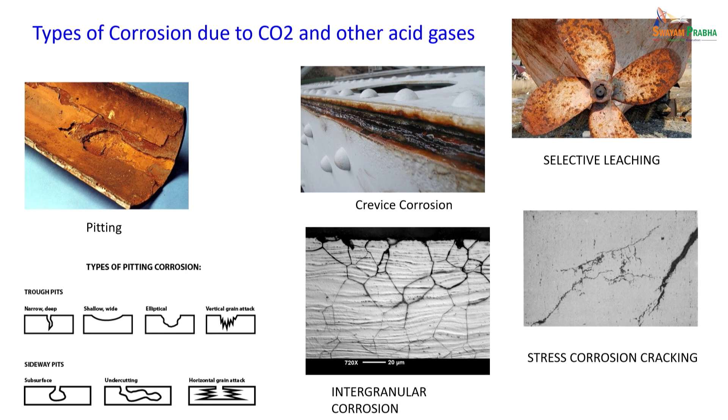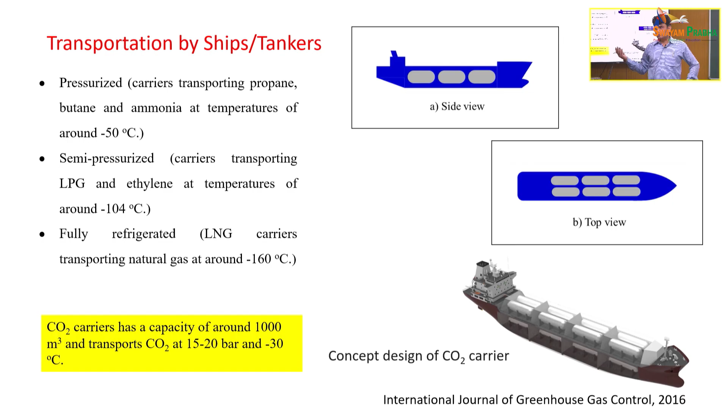This is a schematic design of how the CO2 tankers may look. You have a top view and a side view, and these are very well contained in ships. Like LNG tankers, a similar kind of technology can be adopted to generate such capacities, and we have to see how this CO2 can be transported and stored by pipelines and ships. So a whole lot of things are required to understand this schematic.

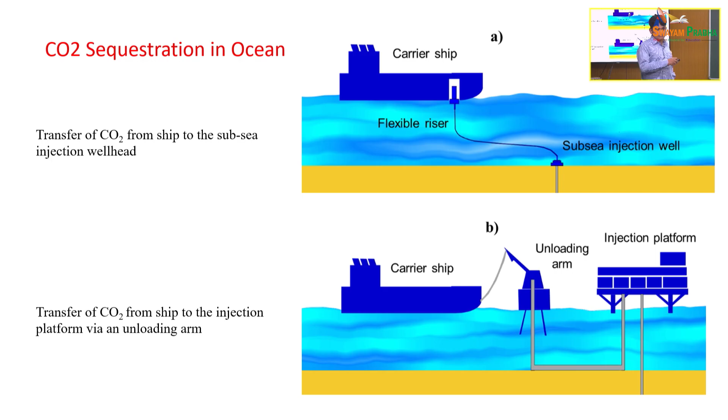Now once you do that, you can inject it into the subsea sediments through a subsea injection well. You can have risers, which the oil and gas industry uses, so you can exploit that for this injection, or you can do it using an unloading arm and existing injection platforms. Schematically it is shown here. So all these possibilities are there.

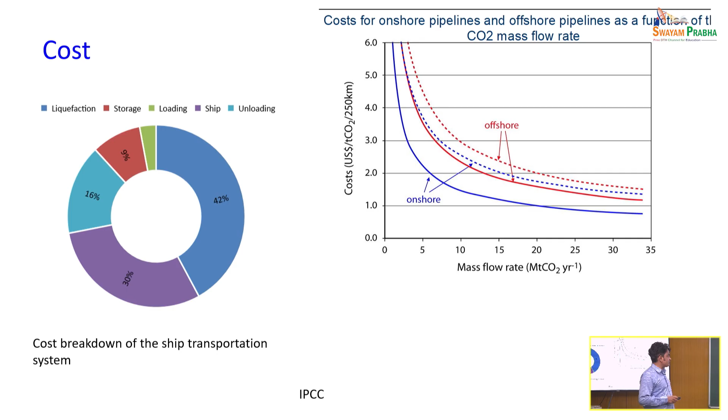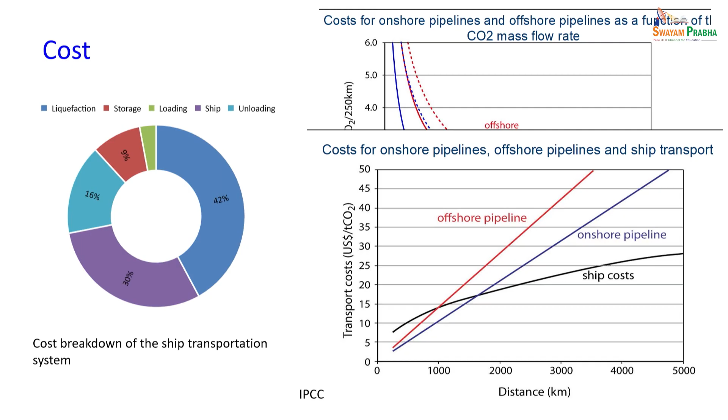And this shows the ship cost: transportation cost in US dollars per ton of CO2 over distance. Below 1000 kilometers, the ship shows a higher cost, and offshore pipeline cost continues to increase dramatically. Onshore pipeline cost also increases with distance, but ship cost comes down below the onshore and offshore conditions. So transportation of CO2 by ships over longer distances may be an attractive proposition. So cost plays an important role.

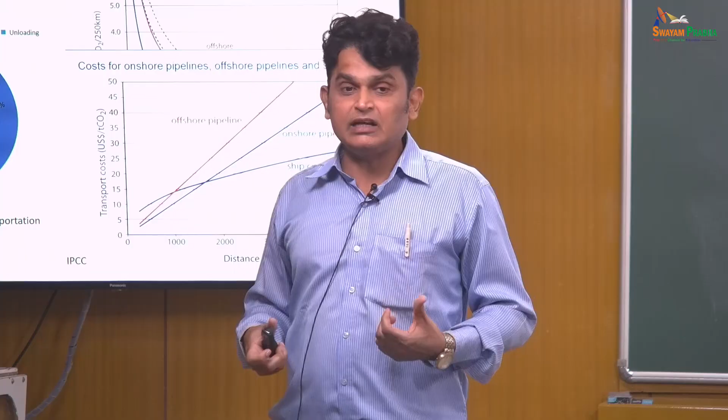As I said, we are doing something that requires a penalty in terms of cost, and we have to see what is best that we can do to make this process overall convenient. Now, another aspect that I think madam will certainly discuss in detail is that CO2 injection onshore can also be done to recover more oil from the reservoir. Thereby you can generate oil and also sequester CO2.

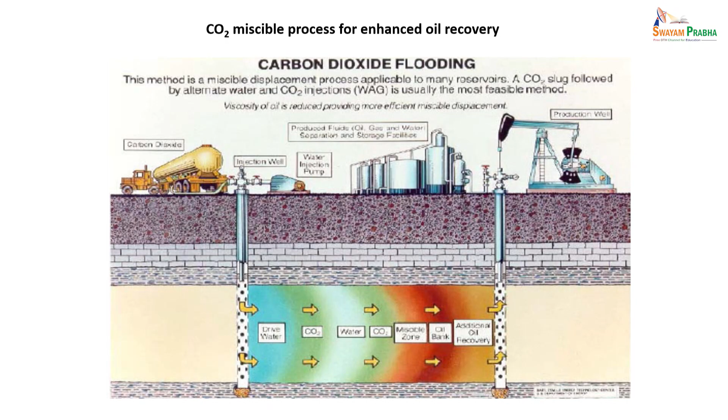There are different phenomena that govern CO2 sequestration. Mineralization takes a long time, but you have capture by the pore network of CO2 on a short time scale, and over a period of time it gets mineralized. So there is a lifespan of CO2. What happens to the CO2? What is the fate of CO2 that goes into the geological formation? There are studies which indicate that CO2 storage over a long time span can be more stable in onshore as well as offshore conditions. So this gives some idea about CO2 capture, and we will discuss more details about that.